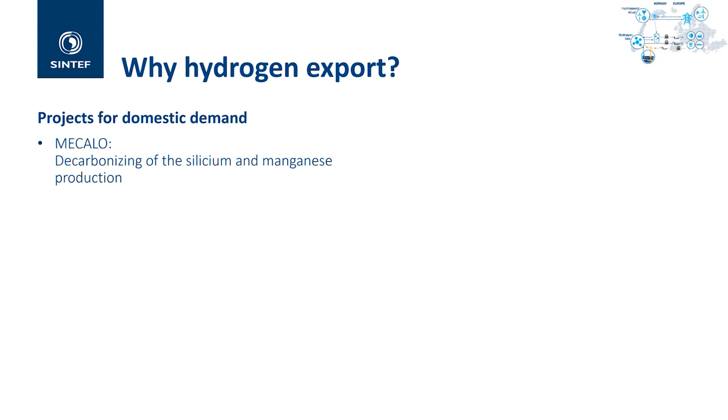There's also the ammonia fuel bunkering network project, which is finishing now, which was looking into developing ammonia as clean fuel for mostly offshore supply vessels, and also especially looking into the bunkering infrastructure - both safety of ammonia, but also how you can transfer ammonia from a bunkering terminal to the ships.

And the last project is the so-called ZeroKyst project, which Sintef and NTNU are involved in, looking into hydrogen as a fuel for fishing vessels. When you take a look at these three different projects, you can see directly also the focus in Norwegian projects: it's about decarbonizing industry, specifically the metal industry, and decarbonizing transport sectors.

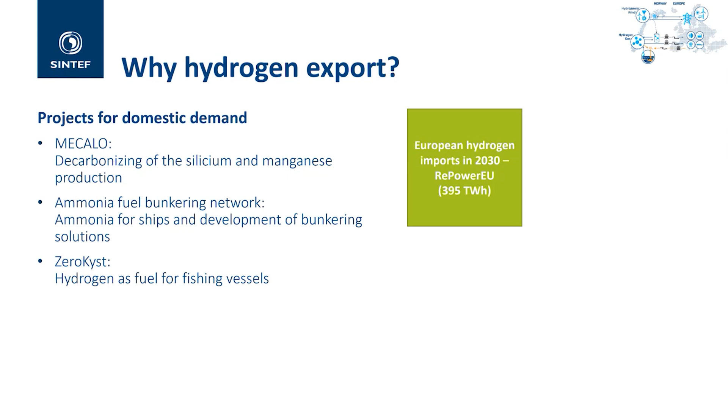For Norway, if we take a look at the net inland consumption, so pretty much what is consumed in Norway except for energy as a resource, it's only 218 terawatt hours, and the majority of that is covered by electricity. So the Norwegian energy system is heavily decarbonized, except for transport and industry, specifically the metal production industry. Another number here is the net inland access, which also translates how much energy is consumed by the energy producing sector, in this case offshore oil and gas.

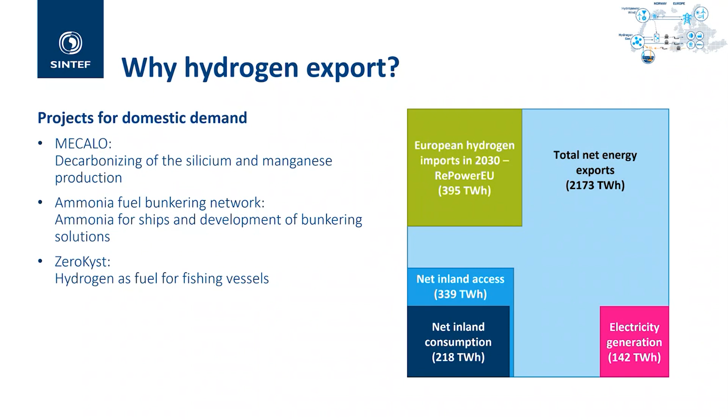To give a few numbers on top of these: the electricity demand in Germany in '23 was 460 terawatt hours, France 450. So we're talking here about large scale numbers, and Norway can actually produce quite a lot.

Now, hydrogen can be exported in two ways. Let us first look into pipeline gas exports. For pipeline gas, we did quite a lot, hundreds of simulations, to look how it can develop from 2030 to 2050 based on different demands, areas, and so on. The exact numbers really do not matter, it's what you can take out of it. Here's one example from a case study which we did.

First of all, the hydrogen exported from Norway includes both natural gas refining with CO2 capture, so-called blue hydrogen, and electrolysis, green hydrogen. It starts initially with blue hydrogen, later transitioning to green hydrogen based on the boundary conditions and the cost which we assume.

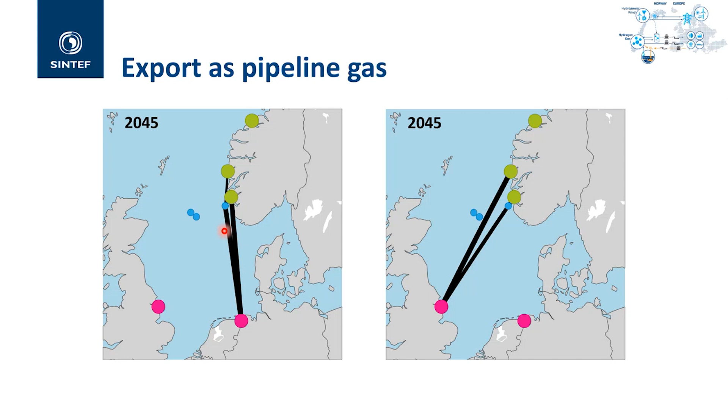Now, another frequently discussed topic, and specifically by people who have no understanding about process control, is exporting in liquid form. You can export hydrogen in liquid form, as ammonia, and as liquid hydrogen. Both processes are energy-wise rather similar with respect to how much you need. However, you need more hydrogen for ammonia production because you have losses due to the exothermicity of the reaction, while you need more direct electricity if you want to produce liquid hydrogen.

And in this case, we were looking at northern Norway, because northern Norway is currently the only part of Norway where you export liquid energy in the form of LNG, from Melkøya. In this study, in this figure, it's a bit complex. It shows you the different regions which we have. Now it actually has precise numbers.

The coloring, the darker the blue, the more electrolysis investments you have in this region. The numbers on the lines are pipeline investments, and we allowed here to export hydrogen both to northern Sweden, for the metal decarbonization, and also to the global market. In this case, we considered liquid hydrogen and ammonia at the gate of the factory.

One thing which is clear from this next figure, green implies wind investments, and the darker the color, the more investments.

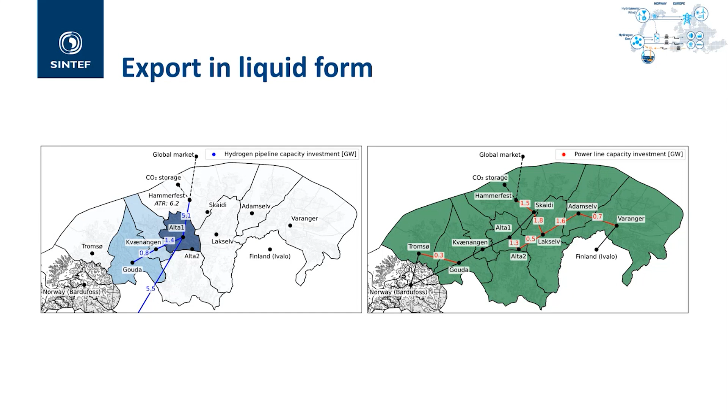You need a crazy amount of renewable energy if you want to export that. We're pretty much always capped at the maximum we allow for the individual regions. That has to come through. I'm not going into the full discussion with respect to whether it's feasible or not. I'm just saying, if you want to export either liquid ammonia or liquid hydrogen from Norway, then you can't circumvent

additional power investments or increase in renewable power generation. A second interesting point from this figure, and it's very difficult to see based on the numbers, is that the hydrogen production is pretty much centralized where they want to go from, while the renewable power generation is invested everywhere. So for the hydrogen pipelines, if you go for really small pipeline size, the transmission infrastructure sizes, you don't build a pipeline. Small pipelines are ridiculously expensive relatively compared to large pipelines.

So in that respect, economy of scale is playing a major role. So you only have investments in these three regions in electrolyzers because you don't want to invest in it elsewhere. Now for the power lines, there's a bit of an assumption again, boundary conditions. We assume that you do not have economies of scale, which is obviously not true, but the question was frequently done in the modeling. So in that respect, it prefers to invest in power lines to get to a centralized location and then invest there into electrolyzers.

Now, an important point is as well that exports happen both in liquid form, so liquid hydrogen and liquid ammonia. And that boils down again to the difference in electricity demand. We have natural gas reforming with CCS also included, and that is thermal energy natural gas versus electrical energy. So for liquefaction, you need more electrical energy, while for ammonia production, we need more thermal energy. And you try here to maximize the overall profit.

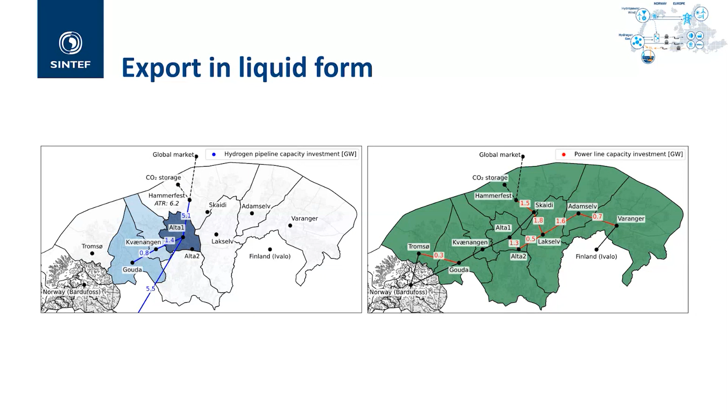Now I was just talking about two case studies specifically done for the hydrogen export from Norway, from Western Norway and Northern Norway. And why is it not happening? If you have followed the news in Norway in recent years, you have realized that the news hydrogen pipeline is put on ice, hydrogen hub put on ice, ammonia production for whatever is put on ice.

Hydrogen currently is again in its hype cycle. It's going down, implying that we have significantly less possibilities for receiving funding, which is not too nice for me because that is how I make my living. But anyhow, what are the challenges for that?

And the key factor is actually energy availability. If you recall the figure which I showed in the beginning, where we had the hydrogen imports the European Union want to have compared to electricity production in Norway and in the other countries, you can see that you need a lot of energy, and hydrogen is really not the efficient approach. You have transformation steps, be it via electrolyzers or via natural gas reforming, if you do not use hydrogen directly but instead convert it further.

And since summer '21, there is an energy scarcity here. So in that respect, obviously, if you don't have energy, why use it in conversion processes? But energy scarcity even more translates to energy prices. For those of you who live here in Norway with fixed price biddings, you're not really affected too much by it. We've seen oil prices and so on, but that does not really matter.

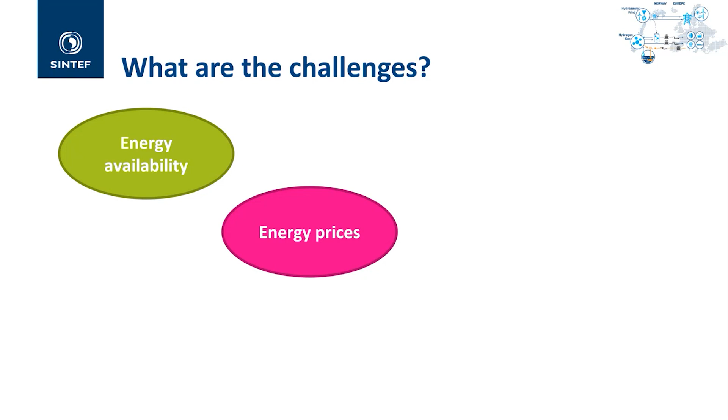And the natural gas prices also again drastically increased. I checked it today at TTF, it's sitting at 50 euros a megawatt hour after having a minimum of 28 at the beginning of the year, and pre-Russian invasion had around 20 averaging. And also now, a point is the CO2 price. It's way too low. We're currently sitting today, again, checked that, at 68 euros a ton.

If energy is expensive, you pay little for emissions, and you do not have sufficient energy, it's a major issue. Now, all of these challenges are not related directly to hydrogen production in Norway or export, but it has an indirect impact on Norwegian hydrogen export because, as I mentioned, you need economy of scale.

If you want to export hydrogen from Norway to Europe, you need to go big. If you don't go big, don't bother doing it. Because a pipeline that transports 2-3 gigawatts offshore is significantly too expensive. It's really cheap if you have a 13 gigawatt pipeline, but a 2 gigawatt pipeline does not really pay off.

That also translates to needing a projected hydrogen demand in the countries, and a lot of people will disagree with me, but except for refineries, you do not have a hydrogen demand today. Ammonia and methanol production is not a hydrogen demand, it's a synthesis gas demand—a mixture of nitrogen, hydrogen, or CO and hydrogen. And that implies these processes have to invest a lot in order to be able to use pure hydrogen instead.

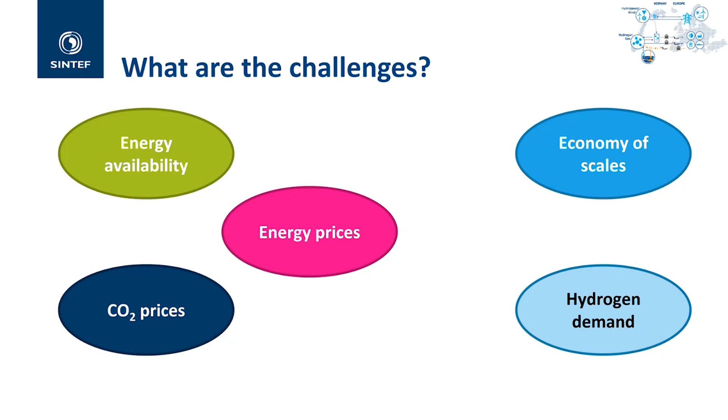And with that, I'm seeing that Vivian is signaling that I should conclude, and I think I've answered the question. Thank you for your attention.

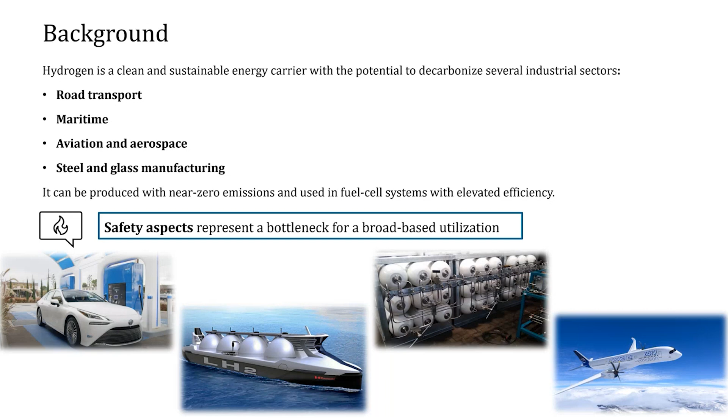As you all know, hydrogen has been widely indicated as a promising energy vector to decarbonize sectors from road transport to the maritime sector, shipping, but also aviation and aerospace, and some industrial sectors such as steel and glass manufacturing. Despite the inherent environmental advantages of hydrogen as an energy carrier, we have to address many issues related to safety that somehow hinder its widespread rollout.

Considering that hydrogen is a highly flammable substance, it is crucial not only to address releases of hydrogen, but also to prevent those releases by avoiding any component failure. A very common approach in safety science is to analyze previous incidents and accidents in order to avoid similar events in the future, and that's exactly what we have done at the beginning of our research.

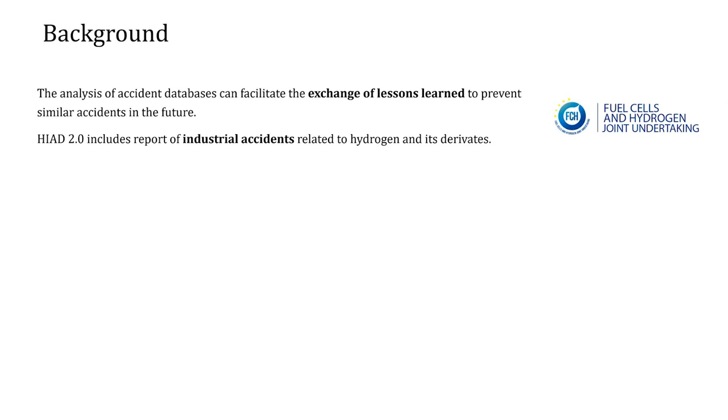We investigated previous observed events collected in the HIAD 2.0 database developed by the European Commission, and we figured out that basically a quarter of all collected incidents associated with hydrogen are due to material failures—component breakdowns. We then tried to figure out how many incidents are unequivocally associated with the degrading effect that hydrogen has on components, and we noticed that 7% of the total are actually due to environmental degradation from hydrogen exposure. So the vast majority of such events could have been prevented through proper inspection and maintenance strategies.

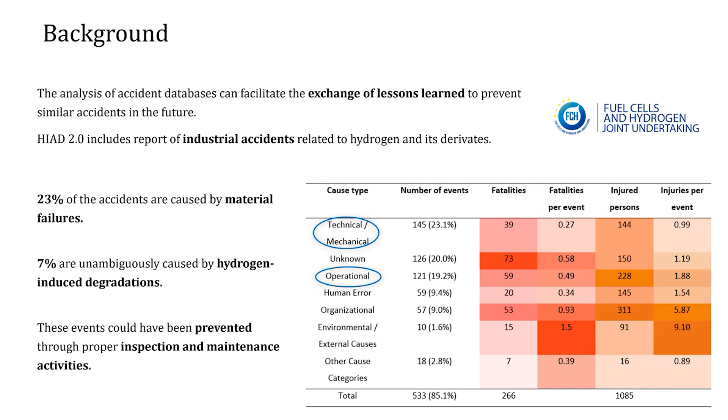Therefore, we focused on this approach to guarantee the safety of hydrogen technologies. But before going on with this methodology, I would like to give you a very brief overview of hydrogen embrittlement, an environmental degradation that results from the interaction of a hydrogen-containing operative environment, a material that should be susceptible to this type of degradation, and also the application of a mechanical load.

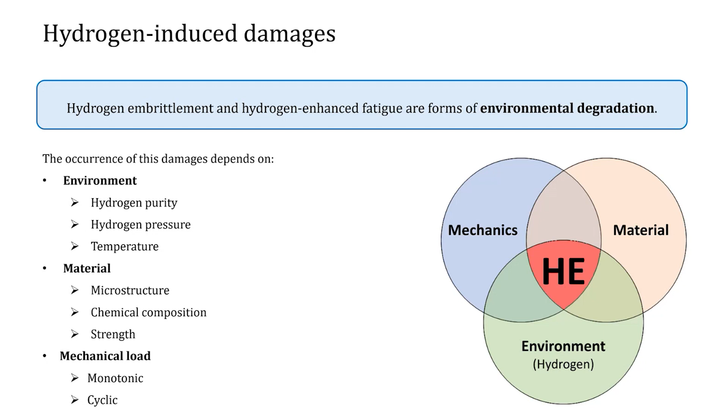When all those factors are combined together, materials can be degraded, and this degradation manifests itself as a reduction in various mechanical properties. First of all, there is a loss of ductility of the material, and this degradation applies to the vast majority of steels that are commonly used for engineering applications.

Second, we have a reduction of fracture toughness, which is very important in the case of impact with external objects. And last but not least, there is a significant increase in fatigue crack growth rate. All those degradations together result in a lower expected lifetime of regular components and quite often in unexpected failures.

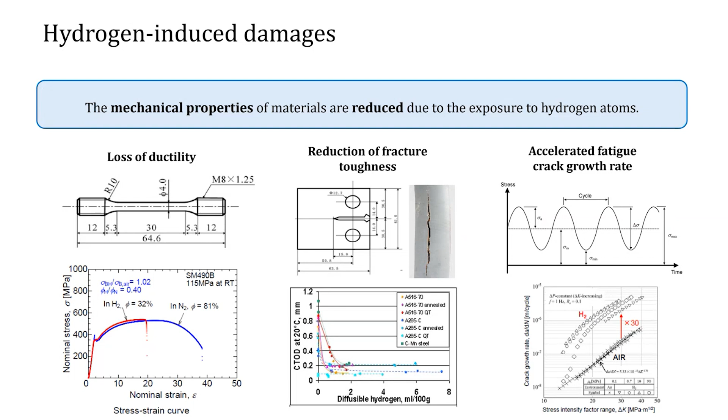A common approach to avoid the loss of integrity of industrial systems is using preventive maintenance approaches. Among the various strategies widely used in the industry, we focused on a recent one developed for the oil and gas sector, called RBI, which stands for risk-based inspection. It's based on the assumption that risk is not equally distributed among the components of a plant, so it's better to focus our inspection effort and associated expenses on components considered high risk. By addressing these components more carefully, we can mitigate the overall risk of the plant and achieve the greatest benefit at the lowest possible cost.

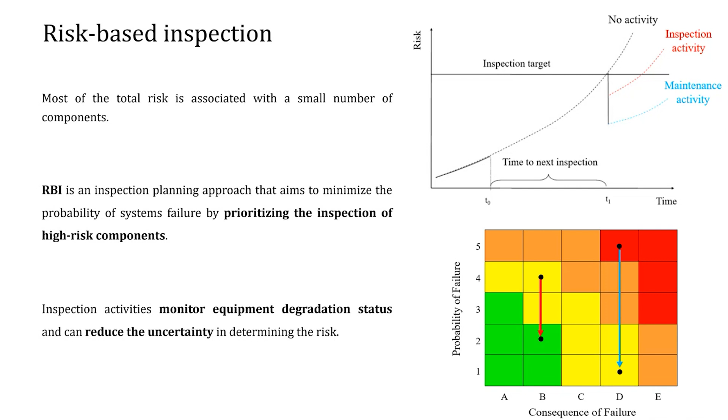We can imagine a release from a certain component, say a compressor or a pipe, and simulate the effect of a hydrogen release. By combining probabilities and consequences of failure, we can calculate the risk, which is basically a product of those two factors.

We can rank our components based on this risk level, and the resulting inspection plan is tailored for the plant, also mitigating the risk associated with the device components by focusing on the most risky ones.

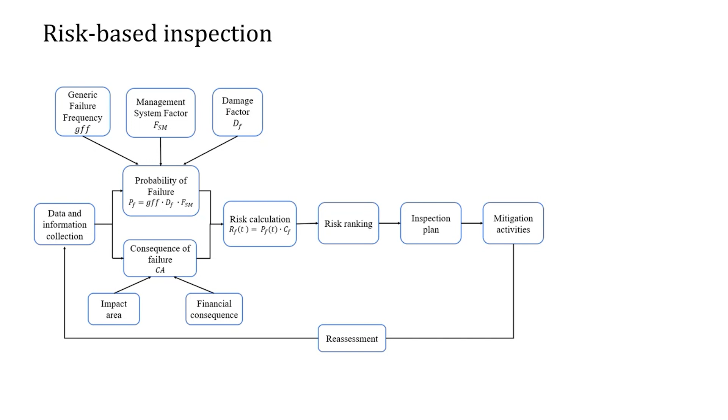After implementing our inspection strategy, we gather other information about the plant status and conditions, and reassess the model. This strategy could at the same time reduce the probability of failure and mitigate the consequences of failure.

It's an iterative methodology, so it tends to improve itself iteration by iteration.

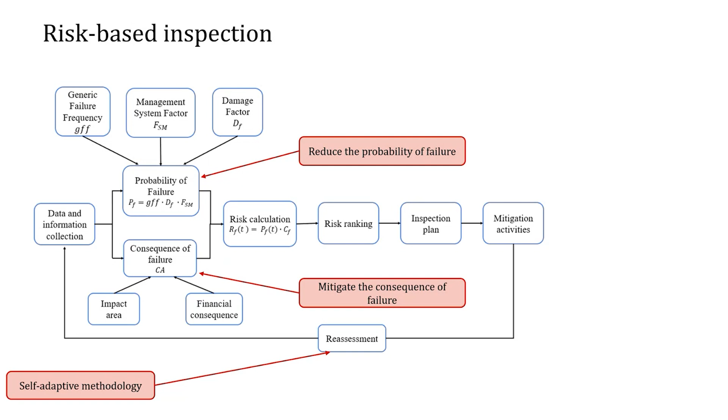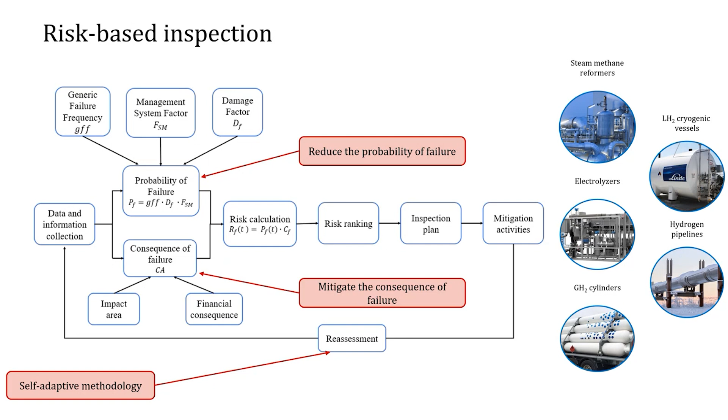This strategy is potentially applicable to a wide range of components, from big steam reformers to pipelines, gas cylinders, and components for liquid hydrogen and marine storage. In order to implement this strategy for hydrogen technologies, it's important to gather data about the components and the materials we're using in our plants.

Considering the high interest in hydrogen transfer pipelines, during my PhD we focused on investigating pipeline steels, conducting tensile tests on material commonly used in existing natural gas pipeline infrastructure. We used a fairly conventional testing strategy that is simple to handle and reproduce compared to state-of-the-art approaches, much less expensive and with fewer safety concerns.

On the other side, I have to mention that the results obtained with this testing approach are quite scattered, so the reliability might be questioned.

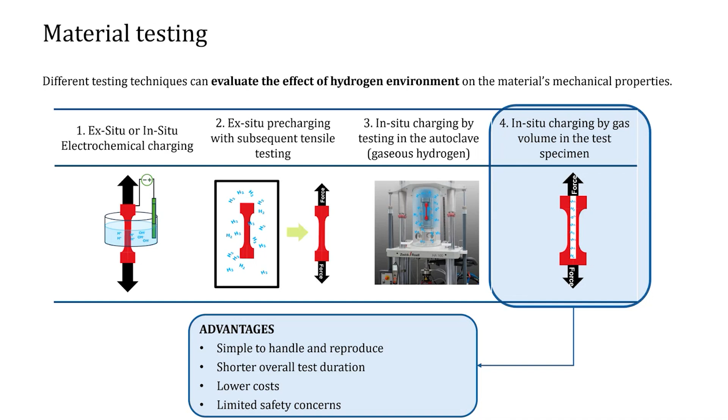During the experimental campaign, we manufactured specimens—small pieces of metal with a hole inside—and compressed hydrogen into the inner pore in order to mimic the real operating conditions of our equipment, more specifically the pipelines.

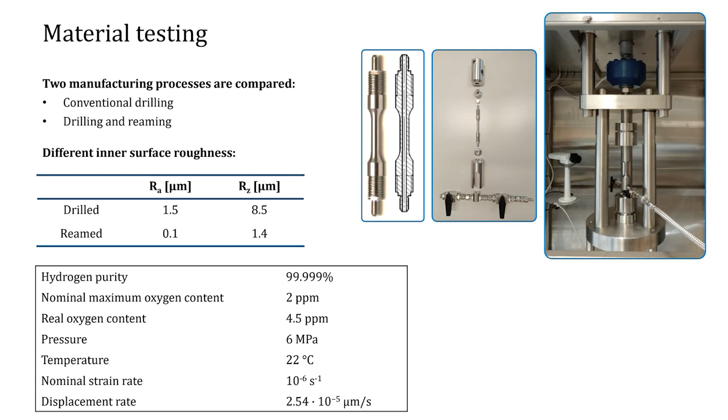We manufactured those specimens with two different techniques, drilling and reaming, to achieve two different surface roughnesses in the inner pore, to figure out the impact of the inner surface finish on susceptibility to hydrogen embrittlement. We considered very high purity hydrogen and operating conditions close to real pipeline conditions: high pressure, approximately 60 bars, and near room temperature.

We used simple bottles to fill the small hole with compressed hydrogen. Considering the operating pressure, we didn't need a compressor.

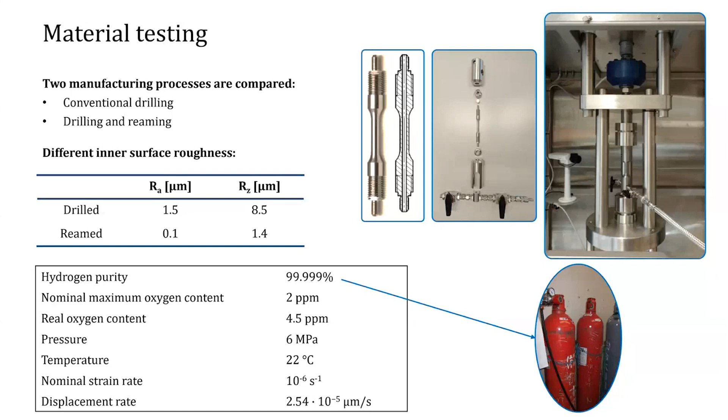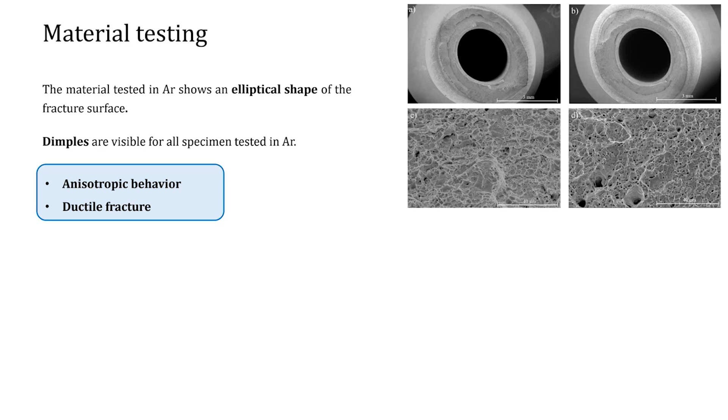Here I'd like to show some results of our experimental campaign. On the upper part of the slide you can see the specimen tested in an inert environment, using argon. The fractography analysis shows dimples, small pores indicating ductile behavior. But for the specimen tested in hydrogen, the fractography appearance is completely different.

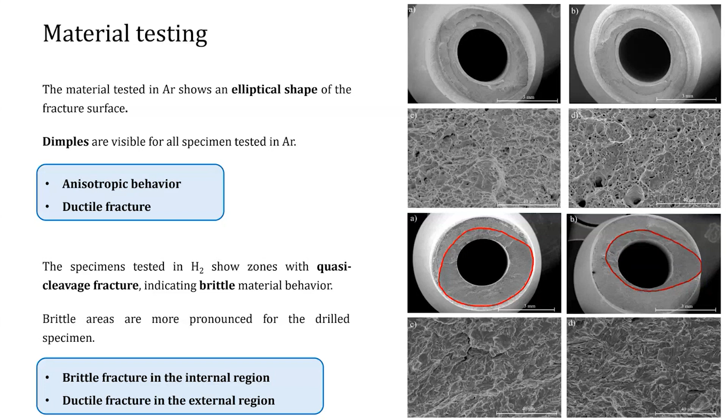You can see this structure, known as quasi-cleavage, which indicates brittle behavior. This brittle behavior has an impact in terms of the safety of the equipment.

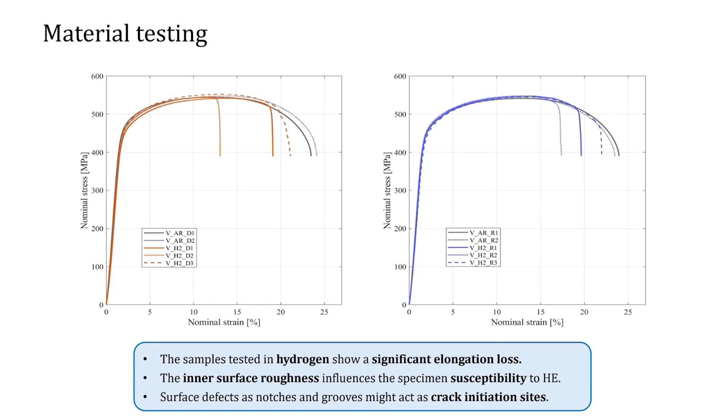Here is a summary of our results. From this graph we can see there's basically no substantial impact when comparing a vintage steel, a very old steel manufactured maybe 30 years ago, versus a modern steel. But there is quite a strong impact when we investigate the effect of surface finishing—the rougher the surface, the more susceptible the material will be to hydrogen embrittlement.

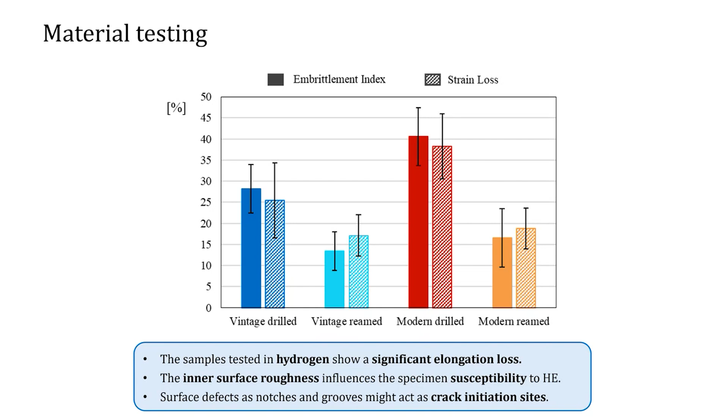Unfortunately, when we investigate pipelines, we can expect very high roughness. Therefore, they will be highly sensitive to hydrogen embrittlement.

After gathering experimental data, we tried to develop machine learning models, data-driven models, in order to predict this susceptibility also for never-seen-before materials and components. We tested the model on a real test stand, using three different pipelines: an old-fashioned one, a large-scale one, and a modern one.

They were manufactured in different years using different techniques, so they present very different technical characteristics. And for each pipeline, we distinguished 3 different legs: one downstream of the compression station, the second one in between the compression station and the suction site, and the last one upstream of the suction site.

All these legs are characterized by different loading conditions in terms of operating pressures and pressure fluctuations within the pipeline. In the case of the section downstream of the compression station, we consider a condition where the average pressure is pretty high, and there are sudden pressure drops when the infrastructure is formally not at the design conditions.

In the second section, there is a mean load condition, so basically the operating pressure is lower, but we have smaller fluctuations. And in the last stretch of pipe, we have a condition known as overload, so normally the pressure is very low, and there are pressure peaks now and then.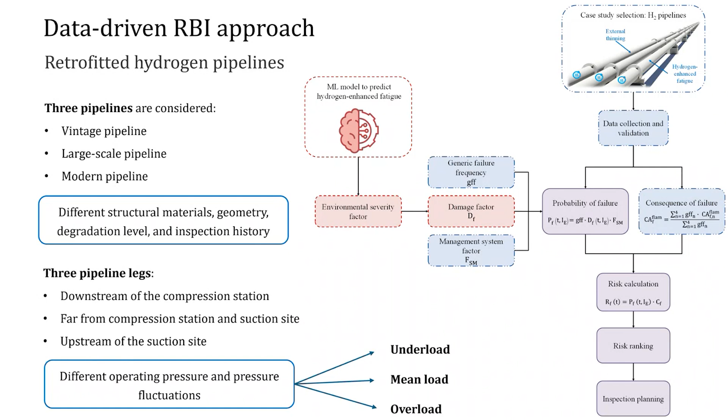After calculating the severity of hydrogen-enhanced fatigue for these components, we implemented the conventional RBI structure that is depicted in this slide. So a brief overview of our results for this case study.

We considered 5 different classes of severity, ranging from negligible to extreme, and we tried to train this data-driven model. We achieved a very good accuracy of 94, sometimes 95%. So the model was deemed quite reliable in the end. Therefore, we implemented this approach.

From the analysis of the features, so the operating parameters that we have considered, we can see that by far the most important point is the so-called stress intensity range, which is associated with the amplitude of pressure fluctuations within the pipeline. A pipeline can operate at constant pressure level, but quite often it is subjected to pressure fluctuation because of different demand of natural gas or hydrogen over the periods of the year or over the daytime.

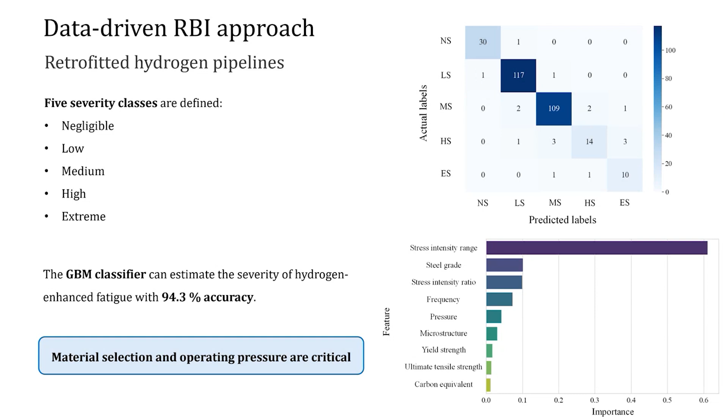Another important parameter is the steel grade. We can see that basically the selection of proper materials for the existing pipeline infrastructure is crucial in order to adapt the existing pipelines for hydrogen transport.

In this big table here, we have calculated the probability following this approach, and we have compared the exact same infrastructure used for hydrogen transport in the first case and for natural gas transport in the second case. As you can see from the numbers in the last column, these are the categories of probability.

So basically the probability of failure for every stretch of pipe. We can see that for the vast majority of our pipelines, the probability category tends to increase when we repurpose the pipeline for hydrogen transport. Therefore, the same infrastructure operating under more or less the same conditions, just changing the operating fluid that we are using, results in a substantial impact in terms of safety.

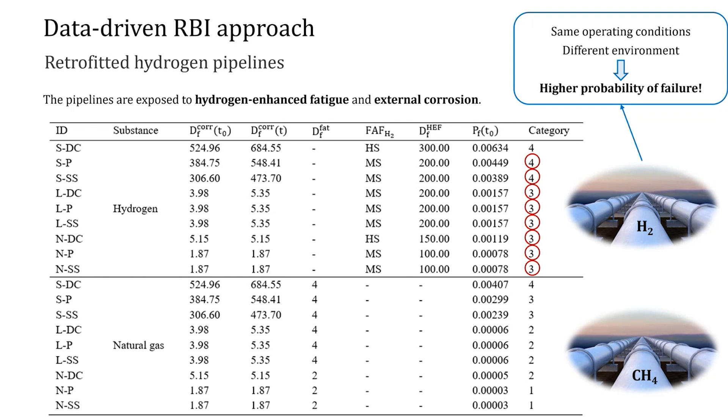So, as I mentioned, same operating conditions, different environment, a much higher probability of failure. Considering on the other side the consequences, we have a completely opposite trend. Even if hydrogen is highly flammable, we see from these column charts here that the consequences in the case of a release from a hydrogen transport pipeline are way lower compared to the consequences of natural gas releases.

That's why for the same hole size, we will have a much lower mass flow rate in the case of hydrogen, because it's a lightweight substance compared to natural gas. So the mass flow is lower, and also the relative heat transfer that is transmitted when hydrogen burns is way lower compared to the case of natural gas.

Calculating the consequences for a set of hole sizes ranging from a small pinhole up to a full bore rupture of the pipe, we can see that these trends remain more or less the same. This is mostly due to the lower mass of hydrogen and also the low thermal radiation that is emitted during combustion.

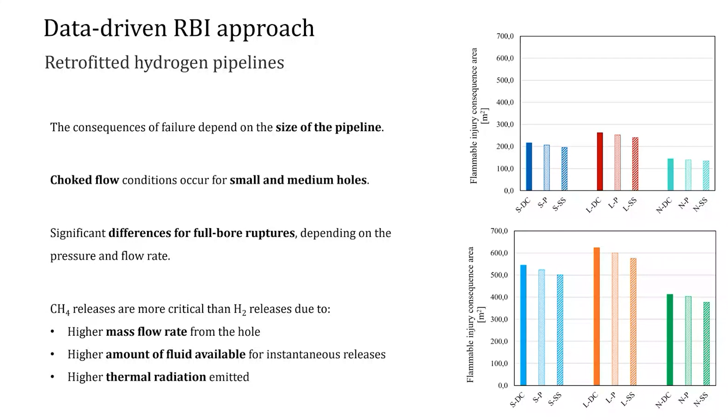So, merging the results of the probabilities and consequences of failure, we obtain this graph here, where the various pipelines and the various stretches of pipe are plotted. It shows on the x-axis the consequences of failure, and on the y-axis the probabilities, in a double logarithmic scale.

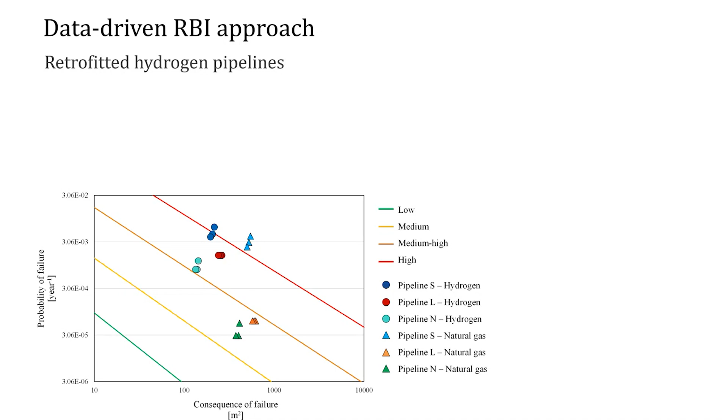You can see that pipelines for hydrogen transport tend to have higher risk of failure earlier, and this is mostly due to the increased probability of failure due to hydrogen embrittlement.

Of course, we try to mitigate this risk, and we developed an inspection plan for each stretch of pipe. We see that the pipelines that are old-fashioned and used for hydrogen transport, particularly the section downstream of the compression station, need more frequent and more extensive inspection activities.

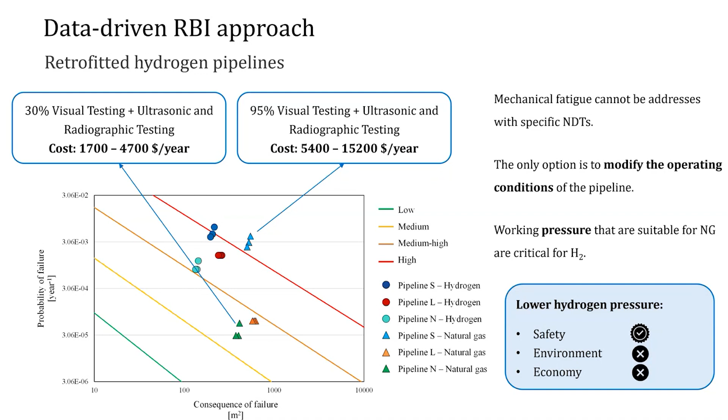Last but not least, in order to mitigate the risk of failure, the only way we have is changing the operating conditions of the pipeline - basically reducing the pressure fluctuations and reducing the nominal operating pressure. If on one hand we obtain a positive impact in terms of safety, we will have a negative environmental impact because we transport less hydrogen, and also a bad economic impact for the infrastructure because it will deliver a lower amount of fuel. So that's it so far.

If you have any questions, I'll be happy to answer. Thank you.